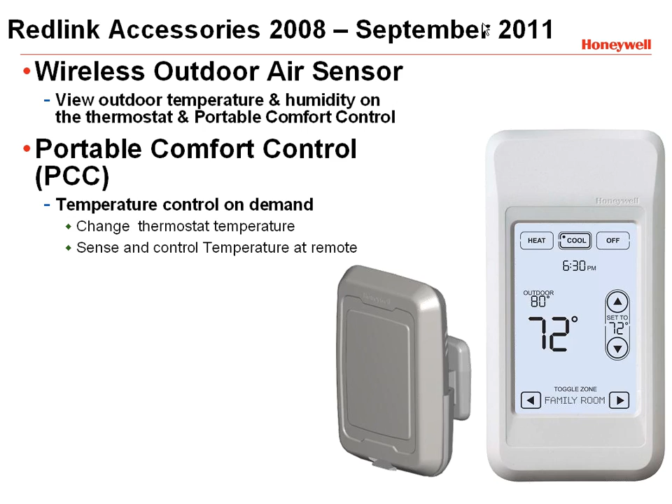So prior to the end of last year, we had actually marketed these RedLink products for the last 4 years now. And the devices that we had out there before then, we have a wireless outdoor air sensor, a portable comfort control, and we have 2 thermostats, the Wireless Focus Pro, which many of you may be familiar with, and the Prestige and Prestige IAQ thermostats, which will now be updated to what we call our 2.0, Prestige 2.0.

A little bit more about the wireless outdoor sensor. Looks like it's having a little trouble coming up. But the wireless outdoor sensor, you don't need any wires. It can be placed on the true north of a building, and it doesn't necessarily have to go on the building. As a matter of fact, we kind of joke that it could go in a tree if you wanted it to. You just want to make sure that the homeowner or the building owner is able to reach it so that they can change the batteries.

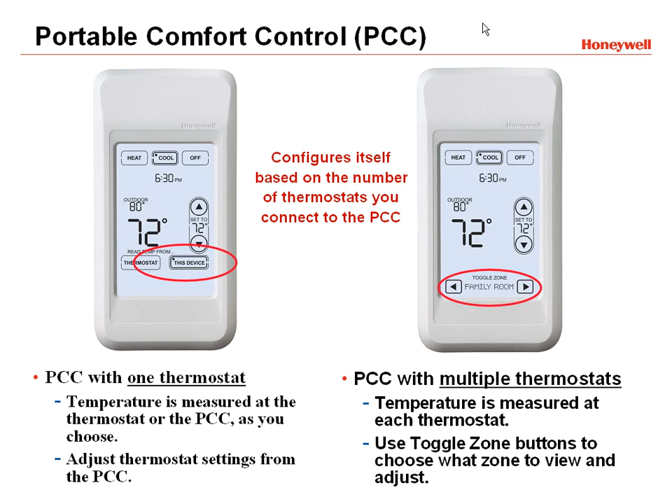So that gives you a quick update of where we were before the end of last year. And then at the end of 2011, we actually moved to what we call RedLink 2.0. So what you're going to see now with the devices, as Greg had introduced, is that now we are internet capable from any internet anywhere, as well as any mobile device, any smart device, as long as it has the internet on it.

And with our Prestige 2.0 upgrade, we're adding the ability for you to do some diagnostics and alerts to the homeowner to let them know if there's trouble with their system. There also are some business generation type alerts and reminders that can help you not only generate some business outside of when you're doing your installation, but also help you connect with your customer and make sure whenever there is a problem that they're coming back to you.

So that brings us to the first item, which is the RedLink Internet Gateway and Total Connect Comfort services. In order to do that, we add a device called the RedLink Internet Gateway. You can see a picture of it there. A lot of people will say that it looks like a little modem, but it is about 4 inches tall and 5 inches wide. Included in our box is the gateway, a 3-foot internet cable, and a power adapter.

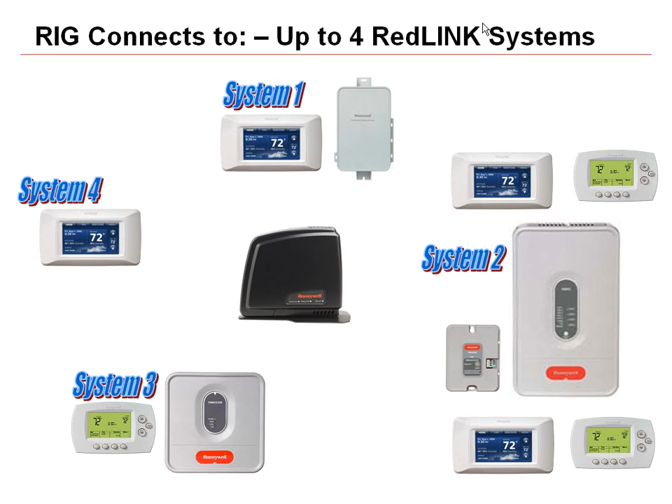So now I'm going to jump into what the end user needs to do in order to set up. I'm just going to quickly go through this so that you can get an idea of what is involved here. And the reason I like to show this is, remember back in the beginning I talked about connecting you to the homeowner. This is a way for your company to be connected to the homeowner by helping them get set up, and in the end there's actually a room for you to put your name in so that whenever they have problems they can actually punch on a button and it'll come to your name and number. And so the website is mytotalconnectcomfort.com.

And to get set up, all the homeowner needs to do is to do like you normally would with any type of account that you set up online. You establish an email and a password and put in all of your information. And then once you've done that, we will send you an email that verifies that you're set up. And then you'll go back in through that email to complete the registration. If you don't get that email, it probably means that something didn't happen and that you need to go back and re-register.

Then what you're going to do is, for each of the locations that you set up, because you can do multiple locations, you're going to grab the MAC code and the CRC code off of the bottom of the RedLink Internet Gateway, and you're going to put that into the website where it prompts you to do that.

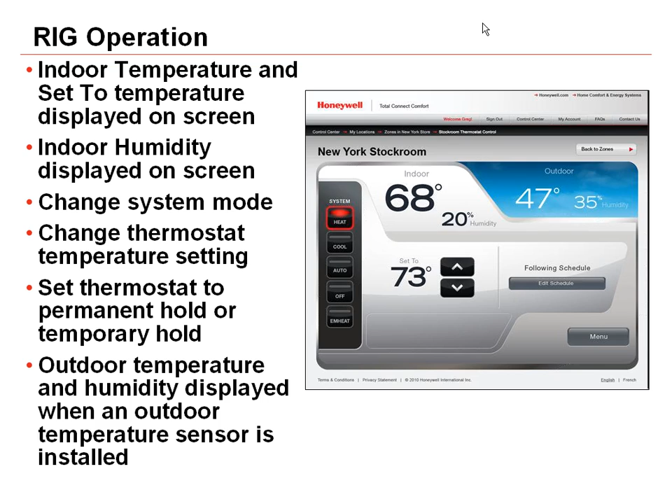So you can actually have thousands of locations. At least we don't know of any high limit to that. So you can have as many as you want, and you can keep adding them. So for example, someone could conceivably have like 50 McDonald's and their homes and all of that all listed in one spot.

And then when you hit each spot, then what shows up are the zones. If they only have one thermostat, there will just be one bar, but in this case, there are 7 thermostats in this California house. And the red areas show that there's a problem in the basement and a problem in the guest room. And then you'll see down at the bottom there, can you push that over?

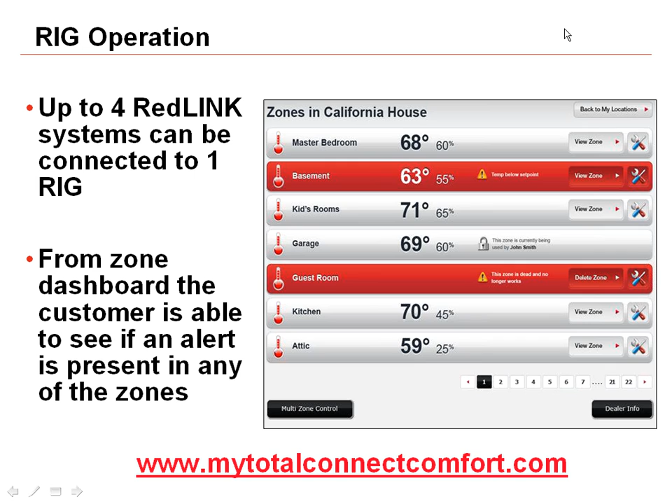We also have the ability to set up sub-users. A sub-user is someone who actually has control over the temperature and over the system. The homeowner can decide whether they want to have a sub-user or not, and they can also give them privileges for certain parts of the system and not others.

So for example, let's say that someone had 10 restaurants, and they had a manager that was in charge of 5 of them and a different manager that was in charge of the other 5. The owner could have a look at all of the locations, and then they could set it up where the manager of the 5 could only see his 5, and the other one would only see his. So it gives them the ability to raise and lower the temperature and also change the system.

We have a little bit of a glitch right now, although in a week this should be corrected. You can't have multiple emails in multiple places. So if you were a user, you couldn't be one in your own building. We're correcting that with the next upgrade, but right now you may or may not want to be a sub-user for a client, depending on how much liability you want to take on, because you will be able to change their system. Pretty much everybody I've talked to about this since the beginning of the year doesn't want that liability. But again, that's your choice.

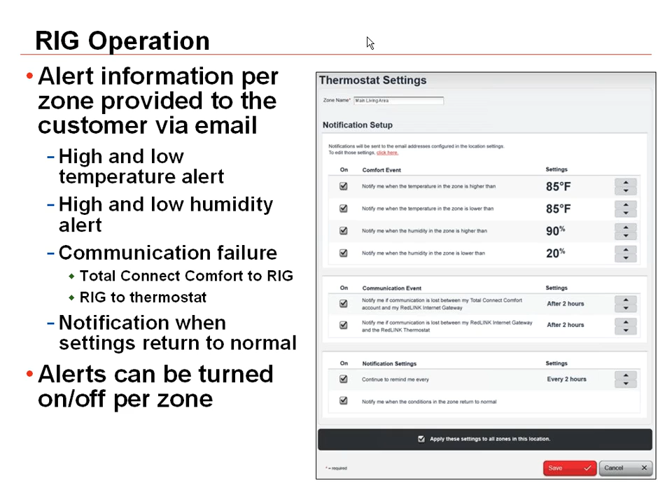We do have apps available today: the iPhone and iPad app, and the Android and Android tablet app. If you have a BlackBerry or any other type of phone, you can still get to My Total Connect Comfort. All an app does is create a shortcut, but the homeowner or business owner can still get to it from their BlackBerry. They just need to go to the browser, type in mytotalconnectcomfort.com, and save it on their phone to get to it easier.

We also have an app available for you guys, and today it's just available for the iPhone. It says demo on it, and you can demo it to the homeowner. You can download it on your iPad, but it doesn't work as well. We're working on that, and we should have one for the Android pretty soon. What's nice is there's a single location demo and a multiple location demo you can show your homeowners when you're out. Words always mean less than a picture, so it's good to show them exactly what they can get.

All of these apps are free. They don't cost you anything. Just go into the Apple Store and type in Honeywell. You will see other apps there because, as I said earlier, our security division uses wireless capabilities as well. But look for the one that has 72 degrees, like what's pictured here; that's the one for heating and air conditioning.

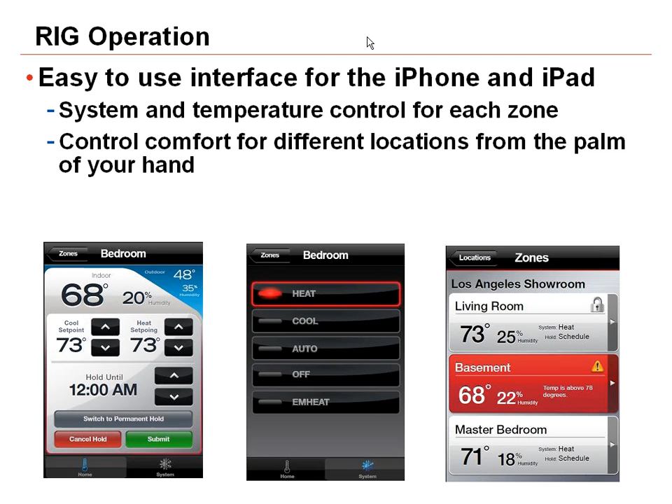Then you'll hit each location, and then what'll come up is, like it shows here with the bedroom, the temperature, and that actually depicts what it looks like when you have it on hold. And then you'll go on the bottom there where it says system. You'll hit that sun there to get to the heat, cool, off, auto, emergency heat screen.

So that's pretty much as far as the internet capabilities. Like I said, in about a week now, we're also going to have the ability for you to be able to change the humidifier setting. You're also going to have the ability for you to change the fan setting. And then we'll also have 90 different alerts that will be available.

And that has to do with the Prestige, and I'll kind of give you a little overview on that here in a few minutes. But there's a lot of things in it that you can turn on and turn off for the homeowner. And so they'll be able to get those alerts over their phone as well. So if they're out of town, they'll not only get alerts on the temperature, but they'll also get alerts on other things as well.

And then we also have the hardwired, but with the hardwired you have to pull all the wires for the equipment, all the wires for the IAQ products, all the way up to the thermostat.

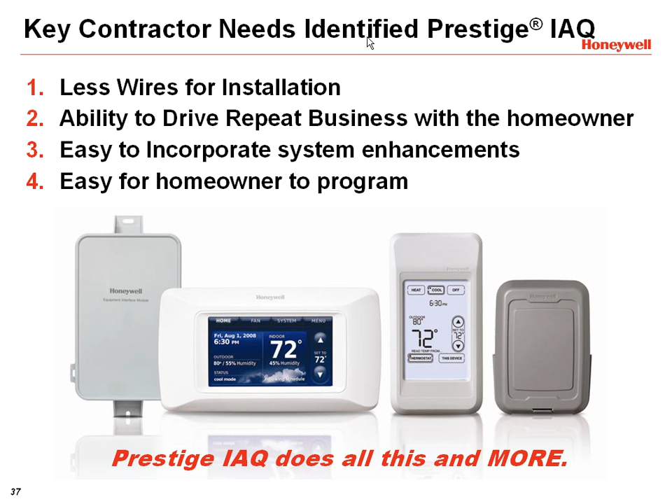So a couple of those things that we've put in to help you drive business are some reminders. We have 4 preset service reminders: fall service reminder, a spring service reminder, a general service reminder, and your warranty is expiring soon. And what you do is you set up the reminder, and then you tell it what month you want it to happen.

But you also have the ability to customize these. And so, as it depicts here, you can actually type in what you want that yellow button to read, and then also when they hit that for more info, what you want it to say. So they give the example of, it's allergy season, call us for indoor air quality solutions. And the homeowner has the ability to reset it, remind them later, or view your information. So you can put in a total of 10 reminders for the homeowner.

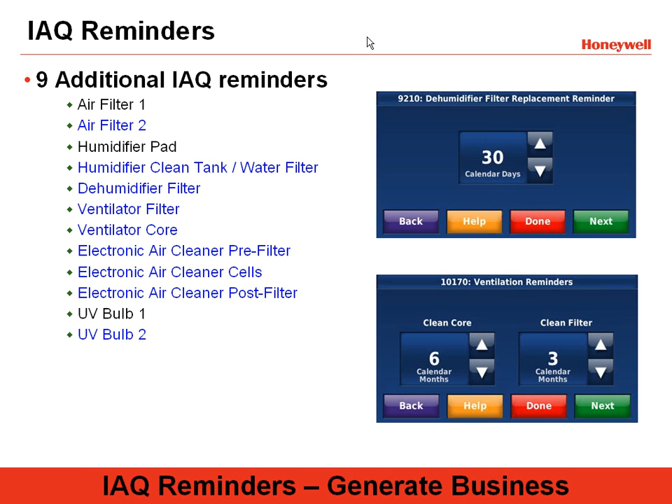with your homeowner. But as a busy mom who usually takes care of all this stuff in the house, I definitely would like to have that reminder, because there's a lot of things on my plate, and I'd like to know that I need to do that. And so keep that in mind, that there are a lot of people that would like to know when they need to do these items to their home.

We also added, for our 2-wire, the one that has the EIM board, the ability for you to do 3 indoor air quality devices all at once. And the way we do that is we have selectable universal outputs, terminals U1, U2, U3, and you can at the same time control a humidifier, dehumidifier, and a ventilation machine. So if you had 1 or 2 or 3 items, the Prestige can control all of those at one time.

We also did selectable universal inputs as well, and we have 2 of those, S1 and S2. Now, some people ask me, if I have already wired devices, can I hook them up? Yes, you can, to those terminals. You can hook in a wired indoor remote sensor and a wired outdoor sensor. And then those 2, the discharge and the return air sensor that I showed you pictured earlier, those also get hooked into that S1 and S2 if you're going to use those. Those come in the pack for you to use if you want, or to keep them for another application later.

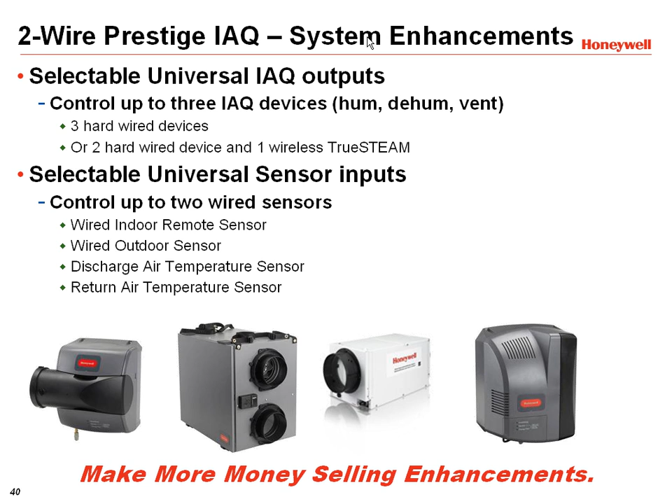We also have pre-programmed alerts, and those alerts have to do with items that you would hook into those inputs, the S1 and the S2. So pre-programmed in there already are full drain pan, dirty filter alert, water leak alert, system shutdown alert, service needed alert, and fan failure alert. But you can also do a customizable alert. So you just select from the list below which ones you want to have.

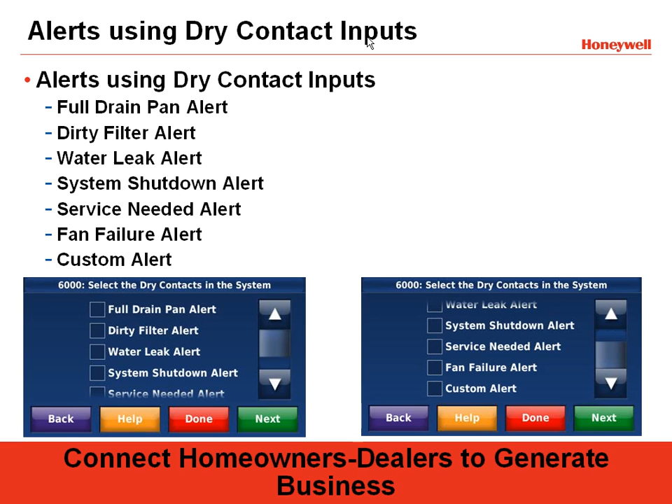So this is an example of selecting the full drain pan alert. And then you just tell the thermostat which terminal you hooked it to. So in this case, they're hooking it to S1. And then you're going to say whether it's normally open or normally closed. And then what the homeowner sees is a button that says your cooling system has a full drain pan. And they'll press the yellow button, and then it shows up that they need to either view your information or be reminded later. And then you can download your color logo into the Prestige thermostat.

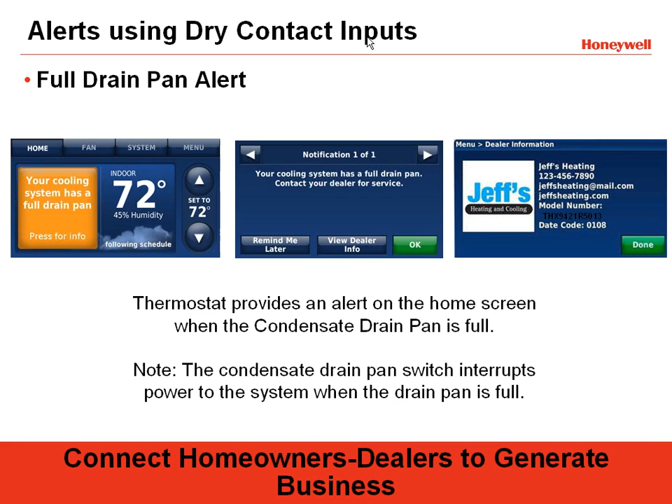You also can do a custom alert. And what everyone seems really excited about is the ability to tell the homeowner that they're having trouble with their sump pump. So they would put in a Watchdog type. I don't know if there's any others, Greg, any other names of ones that you guys sell. But you can tie in an alert to those S1, S2, and then it would show an alert to the homeowner saying that there's something wrong with their sump pump. Especially for those snowbirds that are gone, they really want to know if there's any water seeping out at all, so they can call someone immediately.

You also can change the color of the display if you want.

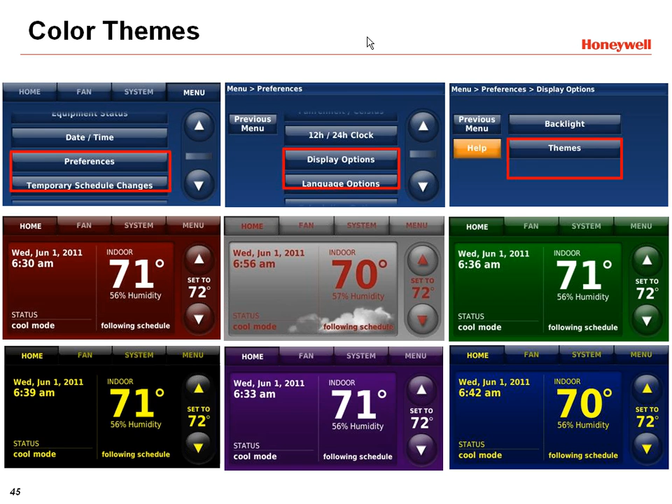So there's different colors. Being that I went to Michigan State and I'm a Spartan, I'm pretty partial to the green and white one. But for those of you Northwestern fans, we also have a purple and white.

So back to the two sensors that come in the pack, we use those for what we call the Delta T Diagnostics.

And what this can do is a couple of things. First of all, it can maybe alert the homeowner to something starting to go bad before it really goes bad. It also can help drive business back to you again if there's something going on. And then conceivably you might be able to solve that problem before it's in the middle of winter or the middle of a hot summer, because that problem will have probably surfaced way before then, and you'll get a seasonality reduction from utilizing this type of Delta T diagnostics.

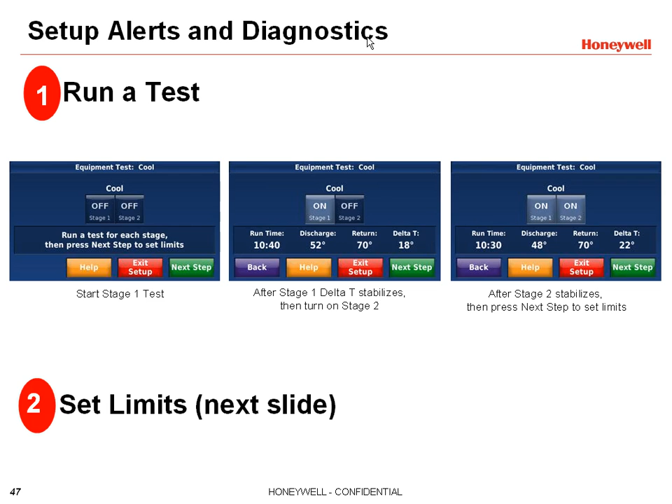So what you're going to do is you're going to run a test of your heating and cooling system. Oops, going too fast, sorry. Then as you can see down in the left corner, this particular test was run, and the Delta T was 22 degrees. And so what you may want to do is say, okay, if it gets below 15 degrees, then I want to be alerted, or if it gets above 25 degrees, then I want to be alerted.

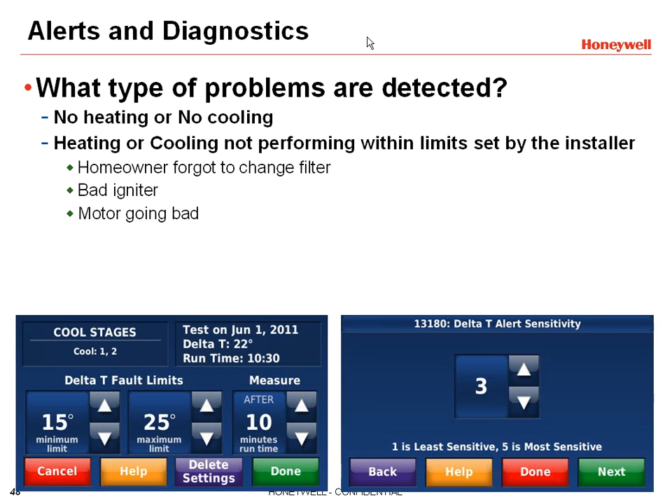And you can tell it how often you want it to measure this, and then you can also change the sensitivity. You can change it from 1 to 5. In case you may be getting some nuisance alerts, you might not want it to be super sensitive. But there again, you do want to catch it if there's problems that are occurring.

So this shows an example of the heating system maybe being below the minimum Delta T. Could be dirty burners, or they need adjustment. The homeowner, again, would see the yellow button or whatever color you've established, and they'll hit that, and then it will show up with your dealer information. Hopefully they don't dismiss it, but they do have the ability to do that.

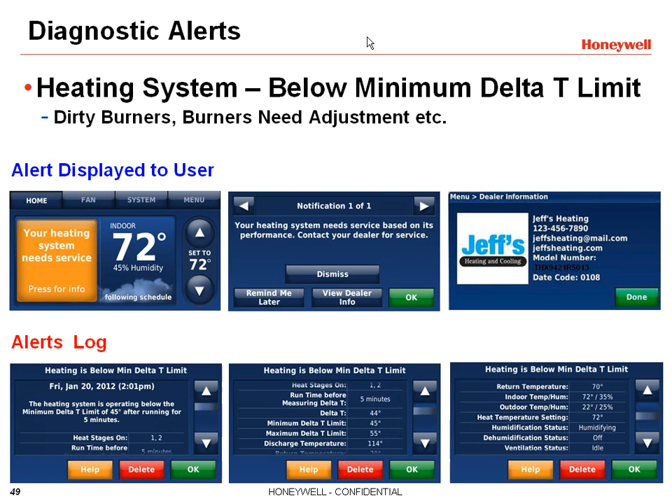And then what you would see, they won't see this, but you'll see in the alerts log exactly what was going on, what was calling, what stage, if any of the accessories were working or not, what was the minimum and maximum Delta T limit, and what the discharge air sensors sensed. So it gives you a quicker way to maybe see what's going on.

So the way you get into this is there's a data logs drop down that you hit, and in that there's an alerts log and there's a user log, and I'll tell you about that in a second. But it will save up to the last 25 alerts that have occurred, and actually you can go in and delete them if you want after you've taken care of the problem. But it will show you what the last 25 alerts are that happened.

And then, as I said, we also have a user interactions log. And we actually save the last 250 user interactions. And some people think this is kind of funny, but I know everyone's run into the problem where a homeowner has fiddled with the thermostat and they want to blame it on your system, but it's not the heating and cooling system, it's them. So this gives you a way to really see if they touched the thermostat.

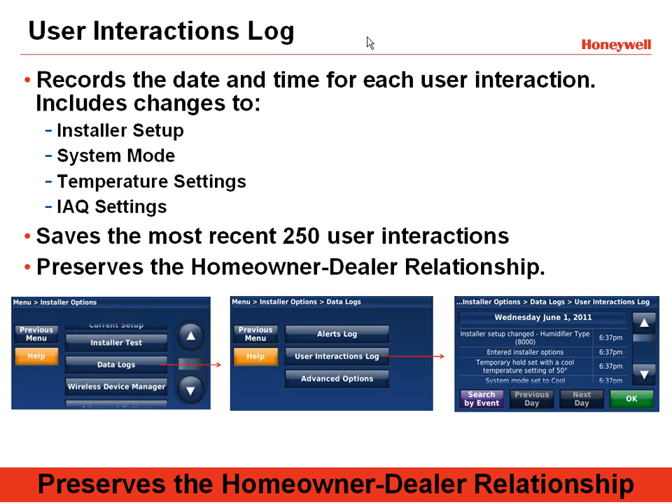So if you have a lady calling you saying that, you know, this thermostat doesn't work in the middle of the night, it's too cold, and it turns out that the husband's turning the thermostat down, this gives you a way to see exactly what they're doing. Again, to help you diagnose it.

Now, one thing I should probably go back and mention is when I talked about the Wireless Focus Pro, the internet gateway, the outdoor temperature sensor, and that portable comfort control are all compatible with the Wireless Focus Pro. But these new devices I'm going to show you right now that have just come out are only compatible with our Prestige and only work with our Prestige 2.0. So they don't work with the previous version of Prestige.

So now what's really exciting is we've come out with an indoor air sensor, and it is wireless. And you can see the dimensions there. It's pretty small. It can also be painted, so if someone has a very nice faux painting on their wall and they have a big home and they've spent a lot of money on that, they can incorporate it into it. Or if you have a business owner or restaurant and they want it to kind of blend into the wall, they can paint it.

You can put up to 6 of these devices in a space. And I say up to 6 because if the thermostat is maybe in the manager's room and you have 6 sensors out in the space, you can do 6. However, if the thermostat is in the space and it's one of those sensors, then you can only do up to 5. So the maximum is 6 depending on whether you're using the thermostat or not.

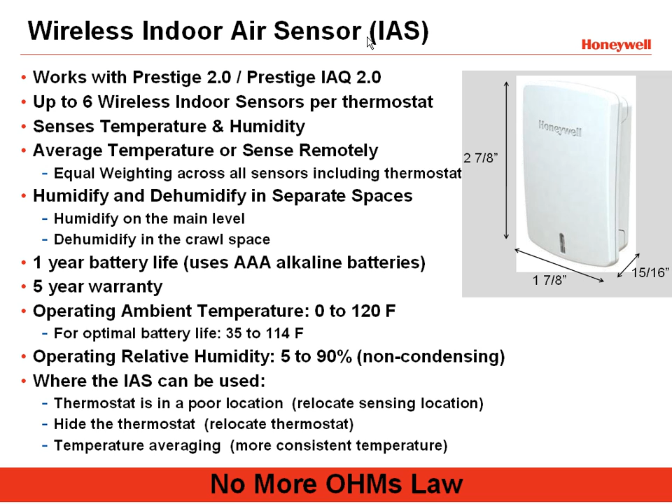As far as the battery and how that works, it does flash red. On the front of that, on the bottom, there is an LED that flashes red 2 to 3 weeks before the batteries are depleted. But before that, the thermostat will actually have on it replace batteries in your indoor sensor, and there'll be a warning for that 2 months ahead of time.

But otherwise, it'll just remain off until you get to that 2-week critical point. Then when you put the batteries back in, it will flash green to let you know that everything is okay. If by chance the batteries aren't strong enough, then it'll flash red if there's a problem.

The next device that we just came out with is an entry and exit remote. This device comes not only with a residential plate, but also with a commercial plate. Because our new Prestige is also a commercial stat, and I'll tell you a few things about that here in a minute, but it comes with the home, away, and vacation for the residential, and with occupied, unoccupied, and holiday for the commercial side. And what this allows is for the thermostat to be set back from one spot.

For each thermostat, you can do up to 3 remotes. So you could do a front door, back door, garage door, or in a business, you could do the front, back, office space maybe. And you can do up to 16 thermostats with each one of these.

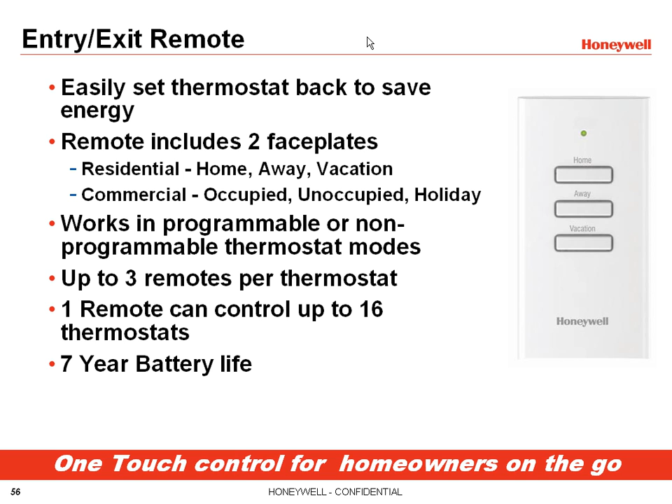The battery inside of it is a 7-year battery life, and it's very, very light, as well as the indoor wireless sensor are very light. You could either drill them into the wall, or they're so light you could even 3M tape them, which is kind of easy for installing. So real quick installation, and the costs on these are very, very low.

Another item, I kind of say that I think this is maybe a little gadgety, but this doesn't have to go on the wall. This could actually be a true remote. And so what this does for ventilation is it can give you a 20, 40, 60-minute boost to your ventilation machine, as well as it can turn on the fan for 20, 40, 60 minutes.

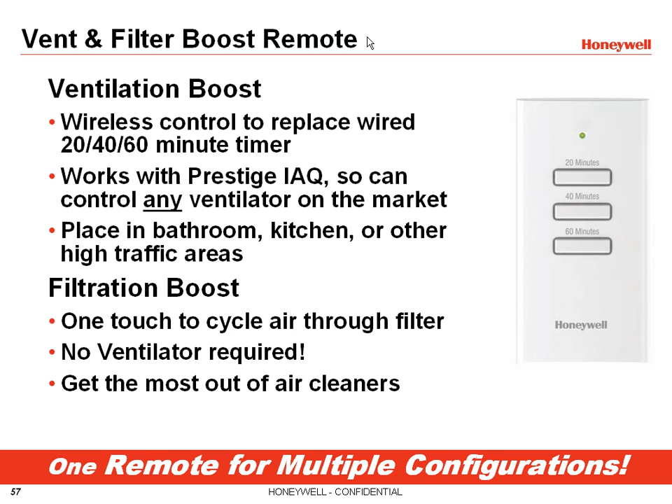So I think in most cases you're probably going to find nowadays that the fan is running all the time, but if it's not, and you have someone with allergies, they might want to hit this in the spring and in the fall when they're having trouble with their allergies, and maybe they want their air cleaners to work a little bit more. Again, fairly inexpensive device for you to add on and add more profit to your sale.

So that's it as far as the new devices. I just want to tell you a couple things about the commercial aspect. So now with the Prestige 2.0, you can carry one thermostat that is applicable for not only your residential but also your commercial applications. All you do is in the beginning you hit whether you want it to be residential or commercial, and the language changes. Although we still do have that easy language I spoke of earlier, we have it also on the commercial side. And it does meet commercial code, and it is Title 24 compliant.

So as I said, you have that easy language where it will just ask you, is the first period occupied or unoccupied, and it helps you with programming it easily within the field, or having the owners program it fairly easily. We also have a holiday schedule that's available, and you can pick the ones that we've pre-programmed in there, or you can also set a holiday schedule. For example, if maybe they might be down a week for Christmas holiday, you can actually select that as well.

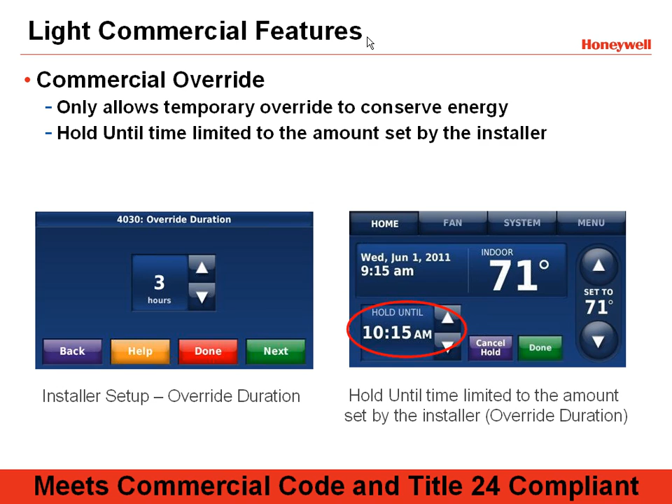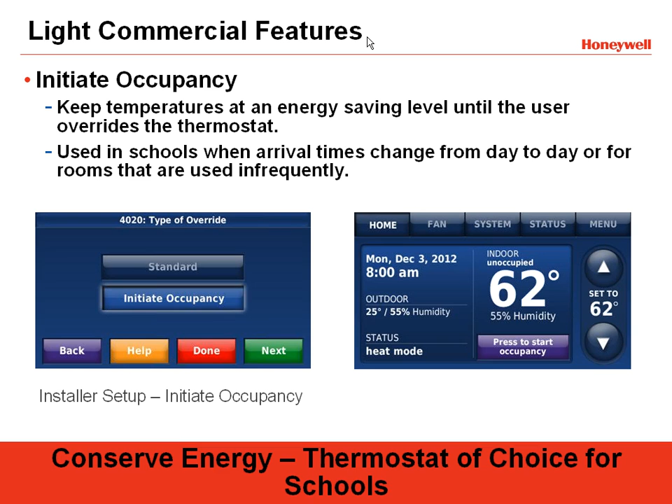You also can have the ability to initiate occupancy. So if, for example, you have a church where maybe the Boy Scouts use one of the rooms, and of course they always turn up the temperature, but they forget to turn it down when they leave, they can press for occupancy, and then whatever setup you did as far as the override, it'll stay on for those amount of hours, and then it'll automatically go back. So on the front of the thermostat, you'll see in that purple button, press to start occupancy. And that saves the church money because it sets itself back rather than staying on all evening until someone comes in the morning and sets it back.

You also can name the locations. So on this particular one, it says office, occupied. So that if by chance you are using the remote sensors and you have these thermostats mounted in an equipment room or a manager's office, then by naming it, you know which thermostat applies with which space.

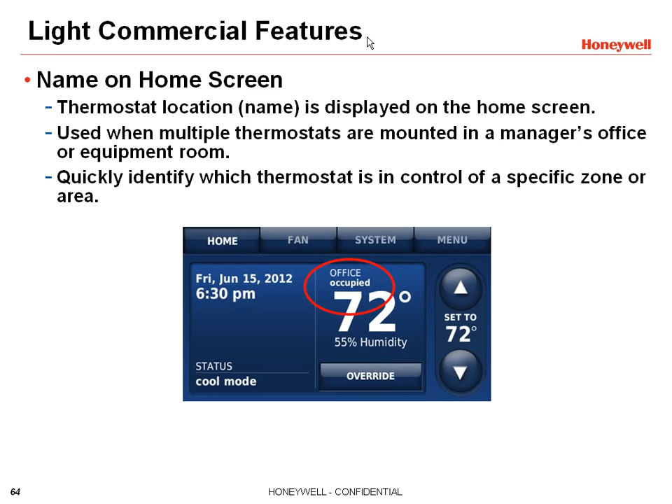You also can use remote setback capabilities, and you can set what you would want those setbacks to do when someone is in the space. And then you also can set whether or not you want it to delay when they leave. And this prevents, if someone's walking in and out, it from going on and off and gives it a little bit of delay to allow that to occur.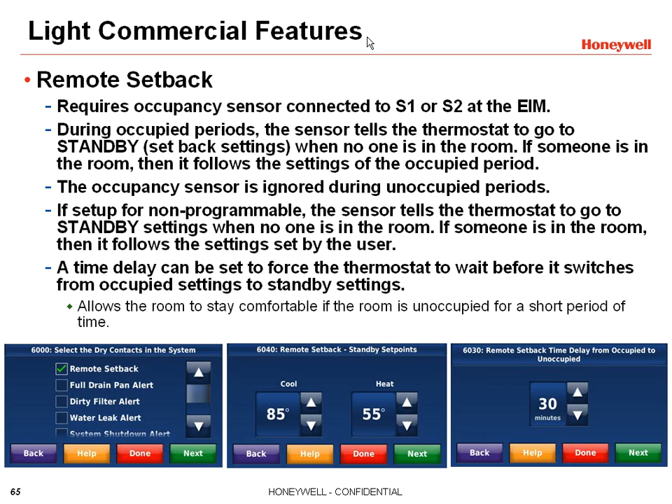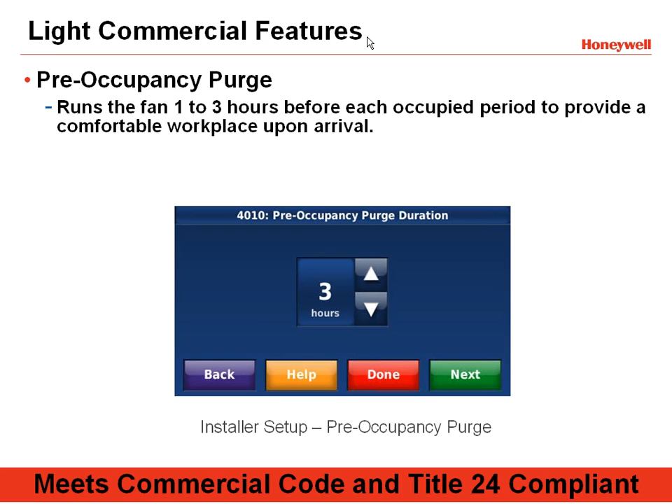You also can hook in on the 2.0. There's a connection that is A-LA where you can put in an economizer. And it works with our new Jade W7220, if any of you are using that, and with the W7212. You also can do a time of day function if you're trying to control lighting panels. And then if you want it to be more comfortable when they do arrive, you can also do a pre-occupancy purge from 1 to 3 hours before they arrive to make sure that the space is more comfortable.

So just to kind of recap, with the new RedLink products, first of all, we made it very affordable for you to be able to offer it to the masses and to be able to go back and actually add it to any of your RedLink applications that you've already put in. And so you'll find that the accessories are very inexpensive.